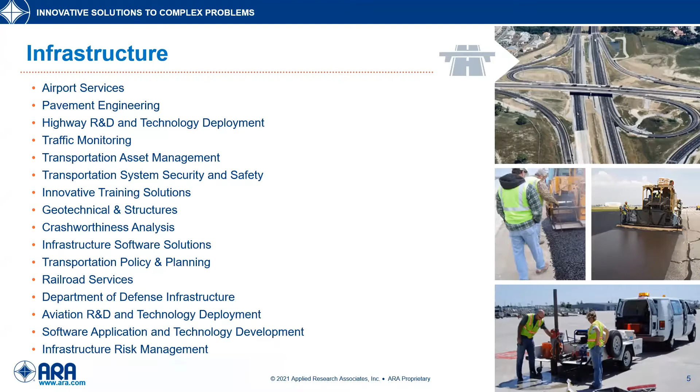So a little bit about the tollway. I'll start with a few basic facts. The tollway is responsible for the construction, operation, regulation, and maintenance of a system of toll highways within northeastern Illinois.

The tollway has 5 roadways that span 294 centerline miles across 12 counties in northern Illinois. We have the Tri-State Tollway, which is I-80, 294, 94, basically connects Indiana, Illinois, Wisconsin, which is why they call it the Tri-State.

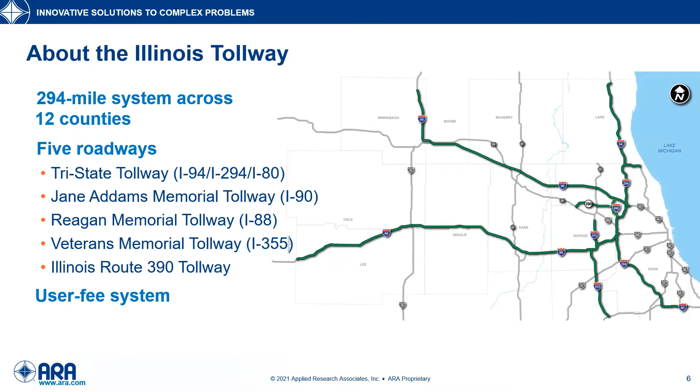So now that we have some background information, let's get into concrete at the tollway. As we go through this section, I'd like to make everyone aware that the research and innovative ideas I'm going to present are not necessarily my original ideas. There have been countless engineers and researchers, some in the room today, like Sachin, that have come up with these ideas and contributed to their success.

A couple people I'd like to mention are Steve Gillen, who was the materials manager at the Tollway until his retirement in 2017, and Cindy Williams, who now leads the materials and pavements group at the Tollway.

Here's a list of the concrete projects I'll be covering today: 2-lift composite pavement, performance specs, HPC, RCC, CRCP, some precast panels and approach slabs, as well as ultra high performance concrete.

The first two are closely tied to the I-90 reconstruction, which happened between 2013 and 2016. This is at the Jane Addams Memorial Tollway I was talking about, I-90. This was a reconstruction and widening project between 2013 and 16.

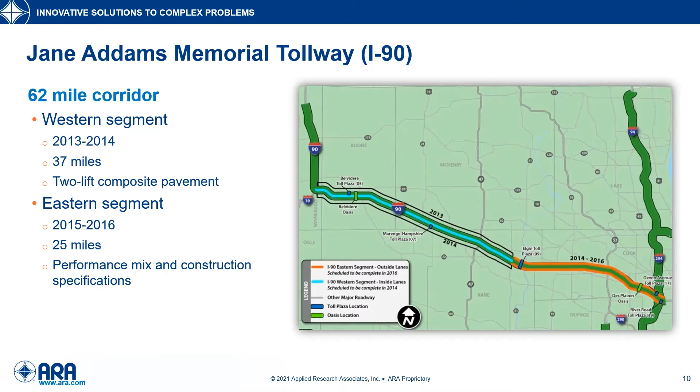Some of the unique aspects of the western segment was the 2-lift composite pavement that was researched at the U of I, led by Professor Roesler and Dr. Alex Brand. The aspects of the eastern segment that I'm going to highlight today are the performance specification for the jointed pavement construction and the performance mix specifications. These mix specifications became more commonplace around this time at the Tollway.

2-lift pavements, specifically 2-lift jointed plain composite concrete pavement with asphalt shoulders, was used for most of the I-90 western segment. Two different concrete mixes were used during construction. The lower lift mix being placed by this machine includes coarse reclaimed asphalt pavement, and this concrete truck is placing a different mix that uses virgin coarse aggregate as the top lift. Then we have the paver in the background that is consolidating and finishing both lifts into the finished pavement, followed up by the standard tine and cure machine.

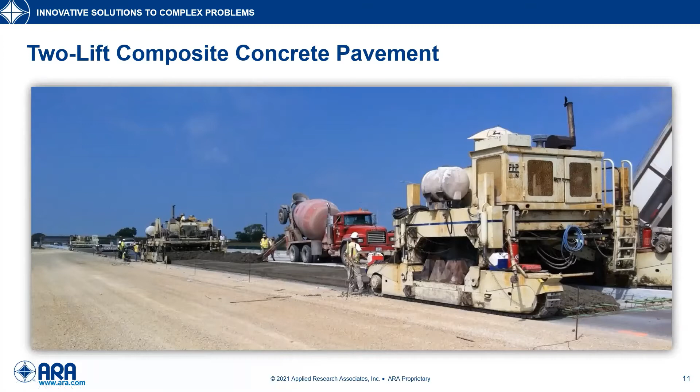Here is a core from that pavement. The concrete mix for the top lift required virgin coarse aggregate, while the concrete mix for the bottom lift required 15 to 50% replacement of the coarse aggregate with coarse reclaimed asphalt pavement. Those are the black aggregates here, you can see in the core. So the bottom lift concrete was commonly referred to as black rock concrete because of that coarse RAP.

The bottom lift also required Portland cement concrete replacement with SCMs, fly ash and slag. Total replacement percentage was between 35 and 50%. The other thing this core shows is a well-consolidated top and bottom lift as it went through that paver.

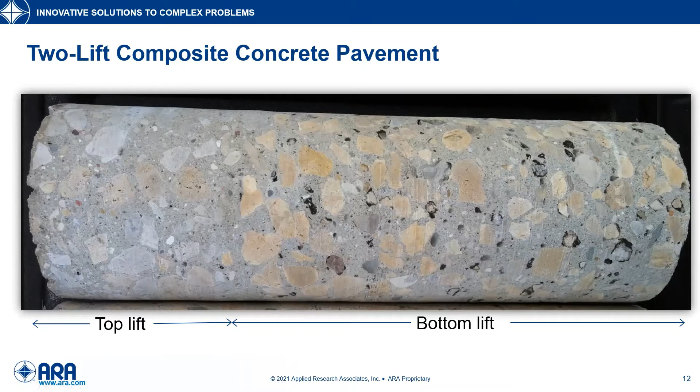These mixes are placed wet on wet, right after each other. So we're looking for full bond between the two lifts, and you can't really even see a bond. It's a full bond on this core. The other thing we're looking for is minimal intermixing between the two lifts. This core is a good example of two distinct mixes that are more or less monolithic. So that was the western segment of I-90.

Now in the eastern segment, the focus was on performance-related specifications. The jointed pavement we built in 2015 and 16 was built with a performance-related construction specification. The idea was to compare the as-constructed pavement to the design and incentivize the contractor if they built it better than design, or disincentivize if the quality was lower than designed. So for that pavement, we had five acceptance quality characteristics in the tollway specification.

This included compressive strength, air content, concrete thickness, surface smoothness, and dowel bar alignment, and each of these acceptance quality characteristics had three levels: a target level, a rejectable level, and a maximum quality level.

The target quality represents the as-designed pavement quality, and it's the level where the contractor would receive 100% pay. The rejectable level represents the minimum quality that can be accepted before corrective action or retesting, reduced payments, or removal would apply. And the maximum quality level represents the level where no further incentive is achievable. Any pavement above the maximum quality level was paid at the maximum incentive.

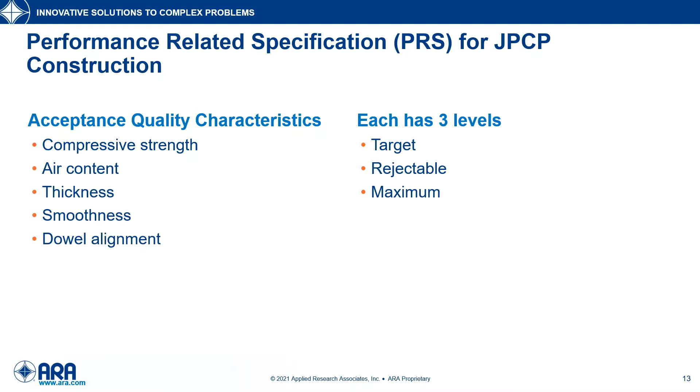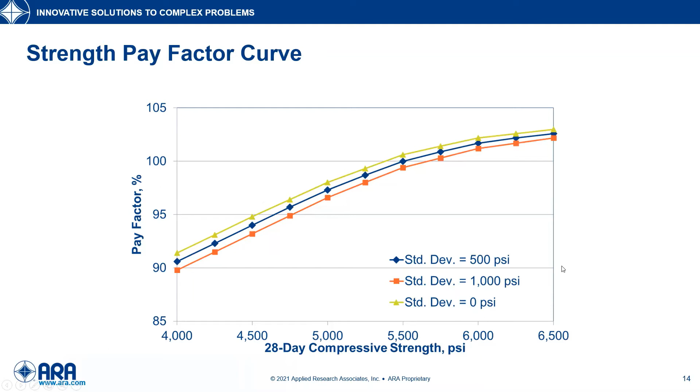If they increased the strength, that was an incentive. Decreasing was seen as a disincentive. And as you reduce your standard deviation, that's also seen as beneficial. So on all these factors, we had curves with the pay factor on the y-axis and on the x-axis, the characteristic we were looking at.

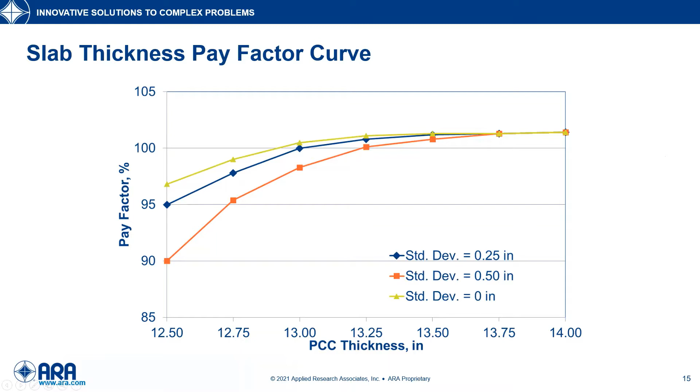But conversely, that same increase does not result in the same increase in service life. This ultimately has to do with the pavement design for that section and the various factors that go into that pavement design.

To wrap up on this performance construction spec, a composite pay factor for the lot was calculated, using each of these individual pay factors, and they all had equal weight. The Tollway selected a maximum incentive of 105% and a maximum disincentive, or minimum, of 85%.

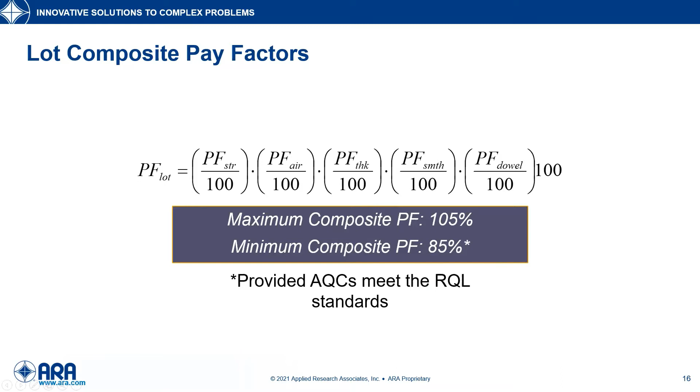So just talked about the performance-related specifications for jointed construction on I-90. This takes us more to focus on concrete mixture specifications and the performance-related specifications for those.

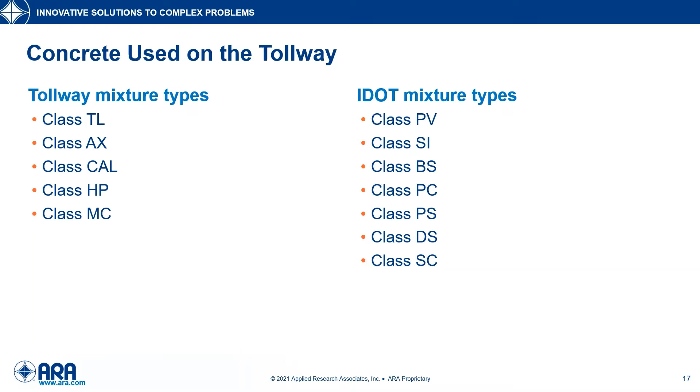The Tollway has five mixture types, and they are designed for specific applications. Both Tollway and IDOT mixture designs can be specified on Tollway construction projects. This is just a list of all the mix types that can be used. I'm not going to go into the IDOT ones in detail today, but these are the Tollway mixture types.

Class TL is the mixture used for pavements. Class AX is a Portland cement-based high-early strength patching mix that can be used in both pavements and structures. 2,500 PSI is our opening strength for pavement patching, and the AX mixtures can usually achieve that in about 16 hours.

Class CAL is a relatively new mixture type. It's used for very high early strength patching and uses calcium aluminate cements along with a latex admixture. The Class CAL mixture can easily achieve the 2,500 PSI opening strength in about 4 hours.

Class HP is our high performance concrete. It's designed to resist chloride penetration while mitigating shrinkage that can cause cracking. The Class HP mixture is currently used for bridge decks, approach slabs, transition approach slabs, and moment slabs.

And finally, we have Class MC, our mass concrete mixture. This is used for structural elements that have a minimum dimension that exceeds 5 feet. So there's limits on the temperature differential as well as the maximum temperature.

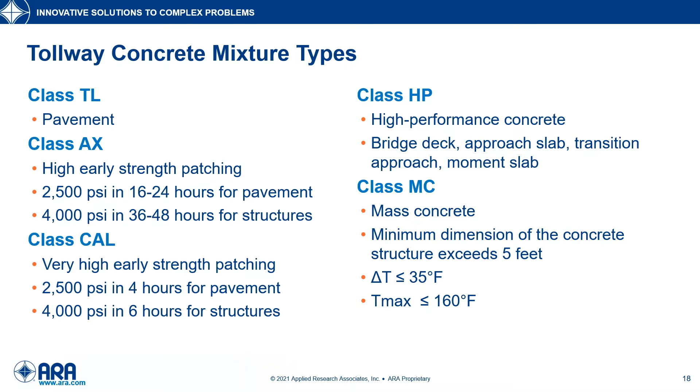So for these Tollway mixture designs, we have 5 primary goals, and these are in no particular order. Strength, we need to have adequate strength for the application, but we don't want mixes that are excessively over-designed.

Durability, the climate in Illinois presents challenges in achieving long-lasting concrete, but it definitely can be done. So, we focus on freeze-thaw resistance, mitigating shrinkage that could lead to cracking, improving chloride penetration resistance to delay corrosion, and then also proportioning mixtures to prevent ASR.

We also focus on constructability, because a mixture that performs well in the lab won't necessarily be able to be consistently batched, placed, consolidated, finished, and cured in the field.

We also have a focus on performance, and the concrete producers, material suppliers, contractors that serve the Tollway, they themselves have a wealth of concrete knowledge and expertise. So having a performance focus allows the Tollway to reduce prescriptive requirements, encourage innovation, lower costs, and increase durability of concrete structures and pavements.

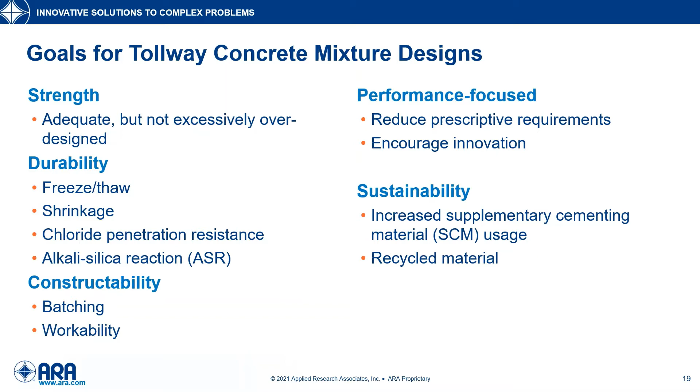And then finally, sustainability. We try to include recycled and byproduct materials in Tollway concrete to improve, or at least maintain, our current level of quality.

So as I mentioned, we try to focus on performance with our Tollway mixtures. This is a list of test methods that are required. Our higher end Portland cement mixtures like AX, HP, and mass concrete require the most testing. The test limits for each of these mix types can be different depending on how the mix will be used.

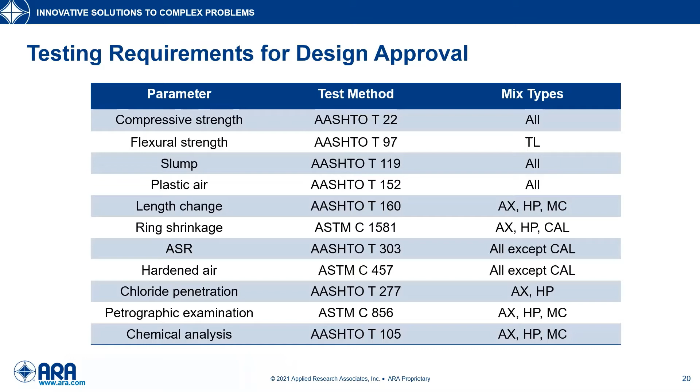So now that we've talked about concrete mixtures as a whole, let's dig into a little more of the details of HPC. So here's an example of the testing requirements for a Class HP mix.

We use the Class HP high performance concrete mixture for bridge decks. It's designed for 4,000 PSI at 14 days. It requires freeze-thaw or hardened air, a slump loss test, linear shrinkage, ring shrinkage, chloride penetrability, and then has some water-cementitious ratio tolerances during production.

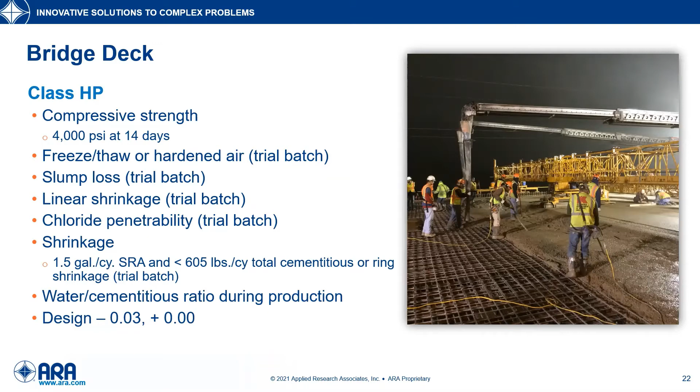And so the bridge deck mix and the Class HP, we're really focused on mitigating shrinkage cracking because it's used for bridge decks. And that's usually achieved through either optimized proportioning and shrinkage reducing admixtures, or lightweight fine aggregate for internal curing.

But here's another option we're exploring. The Tollway has an active research project on super absorbent polymers in concrete to improve durability. This project was started in 2019 and will wrap up at the end of September.

This research includes testing on the SAP material itself, and then evaluating its effect on HPC when used as an internal curing agent. There have been some interesting findings in the lab work, and the research team led by Professor Lange is planning a field test section for the end of April.

Actually, ACI Illinois will be having a virtual chapter meeting on April 22nd, and we'll be welcoming Professor Lange to present the latest findings of this research.

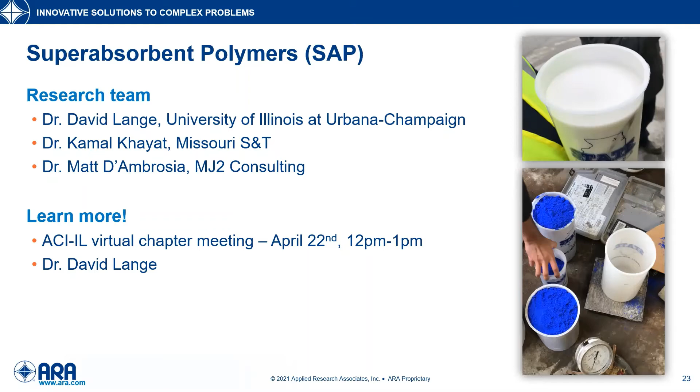Moving right along, the Tollway did use RCC in 2014. Very familiar with these projects. It was used for truck parking lots at 4 Tollway Oases.

And this one, basically 3 out of the 4 projects had an asphalt overlay on the RCC, just to have kind of a better finished surface.

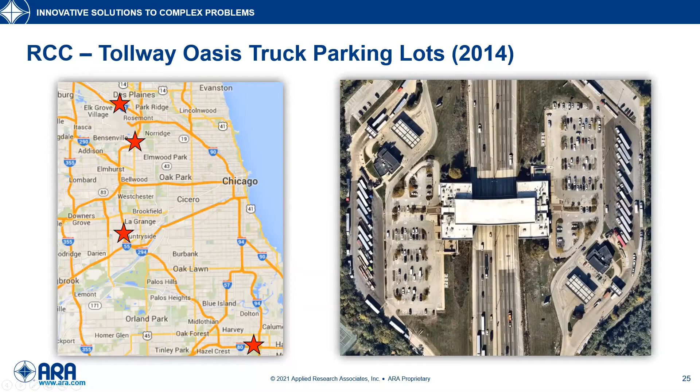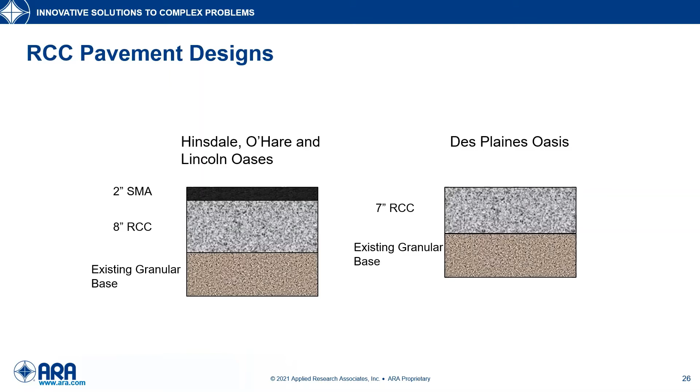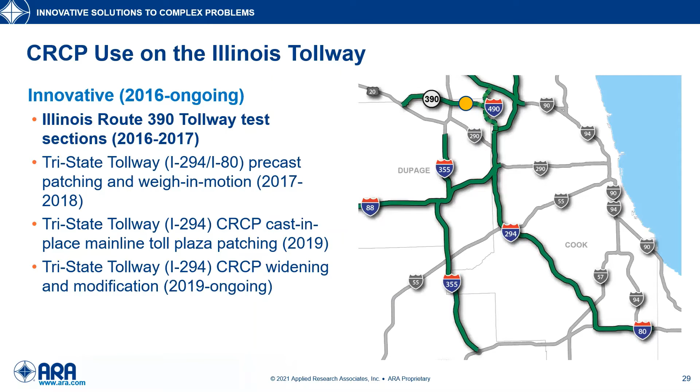So I will first talk about the Illinois Route 390 test sections. The Tollway funded a research project to investigate innovative structural and materials design for CRCP. The project looked at methods to build a more cost-effective CRCP by considering how an internally cured pavement mix would impact crack spacing and width, also pavement thickness and percentage of steel. This work was conducted by Professors Roesler, Weiss, and Zollinger. As part of this research project, the Tollway built 9 3-lane test sections on the greenfield construction section of the Illinois 390 corridor in 2016 and 17 to test out these new ideas.

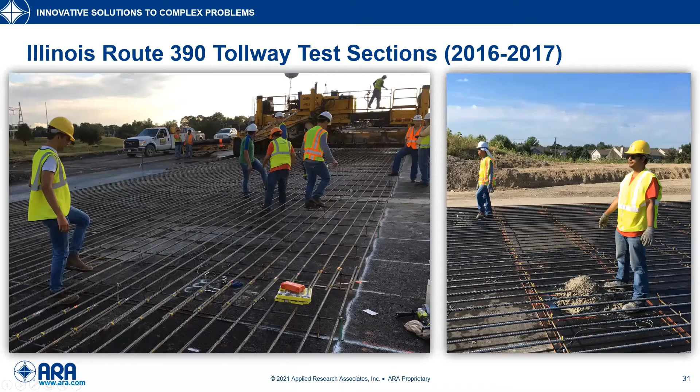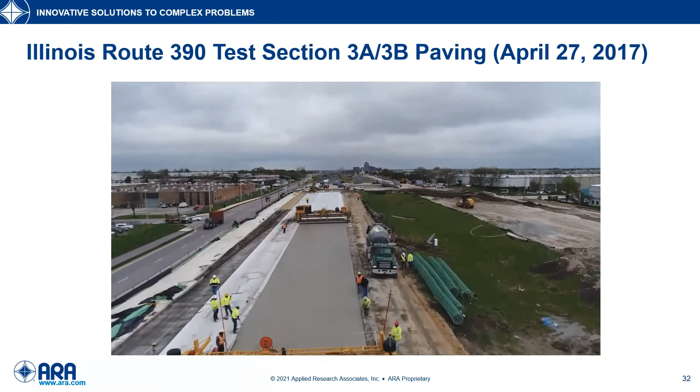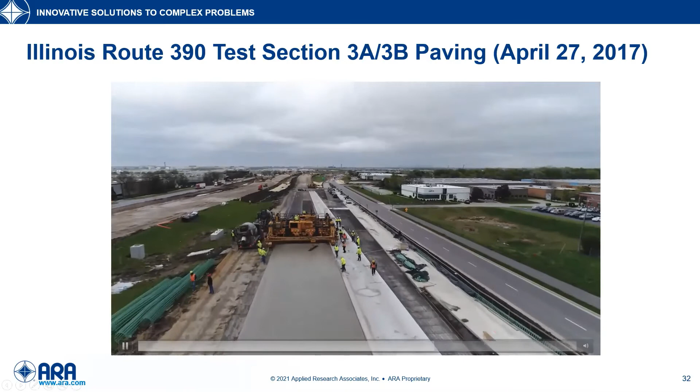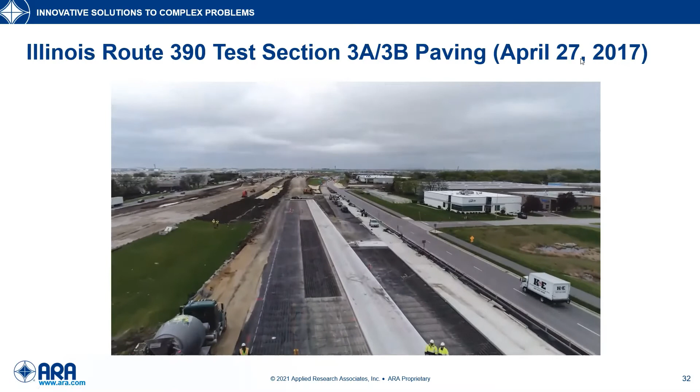Section being tined here had macro fibers. Some of the other unique features - there's an end treatment here, which is a different design from the typical lug system or wide flange beam. And finally, as we get to the end here, you can see these cones, and those are the locations of the various sensors that were embedded in the pavement.

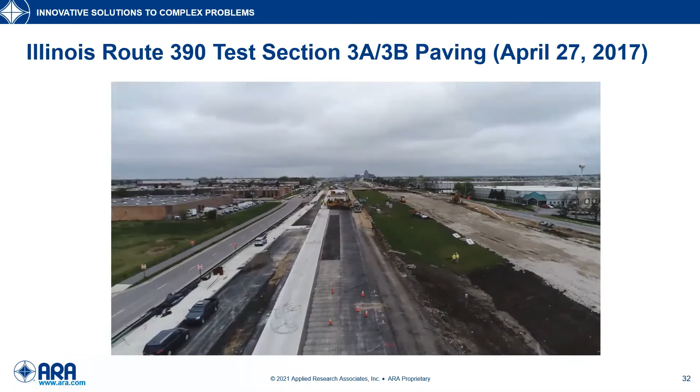All right, so the next project is also CRCP, but mainly focuses on precast patching and weigh-in-motion on the tri-state tollway. The precast CRCP, this was a joint effort by Steve, Shiraz Tayabji, and myself.

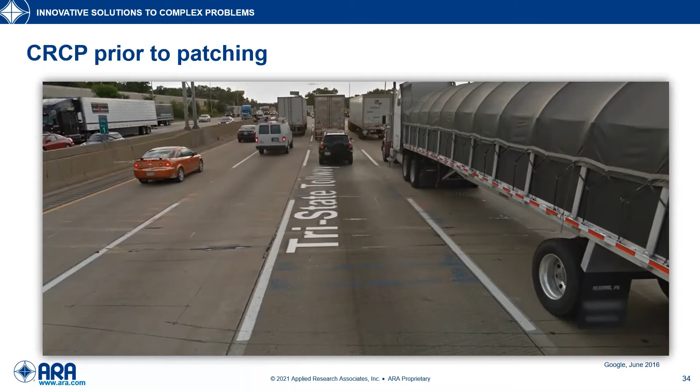So here's a Google Street View of the project site before the patching. There was a weigh-in-motion system in CRCP that was no longer operational and caused distress in all lanes. High traffic volume in this area required an overnight solution to maintain the same number of lanes during the day.

So the patching was performed in October 2017, utilizing precast panels for CRCP repair. The multi-lane night operation was like the conventional jointed precast panels, but it was complicated by the desire to maintain longitudinal reinforcement continuity. So the first night involved marking patch limits and saw cutting.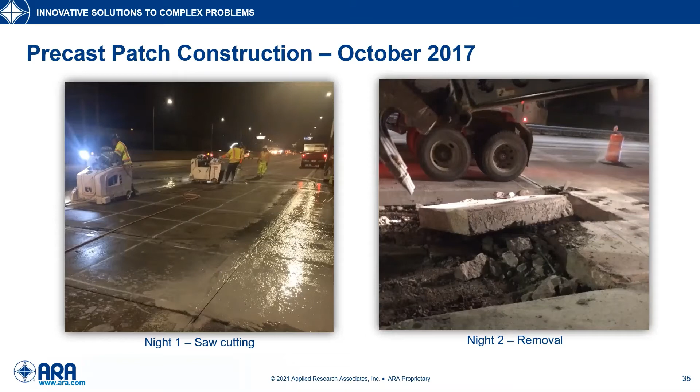The second night, pavement removal began once we had the lane closure set. After the existing pavement was removed, the base was recompacted. We added aggregate if necessary, so that the gap underneath the panel wouldn't exceed an inch. The contractor then drilled and epoxied number 10 rebar into the existing pavement, and this was done to maintain the continuity of the longitudinal reinforcement once the repair was completed.

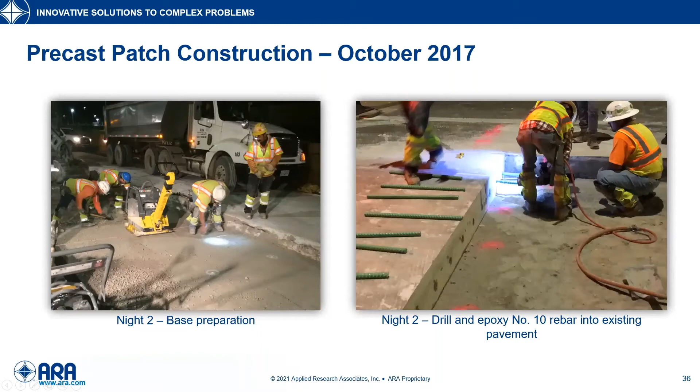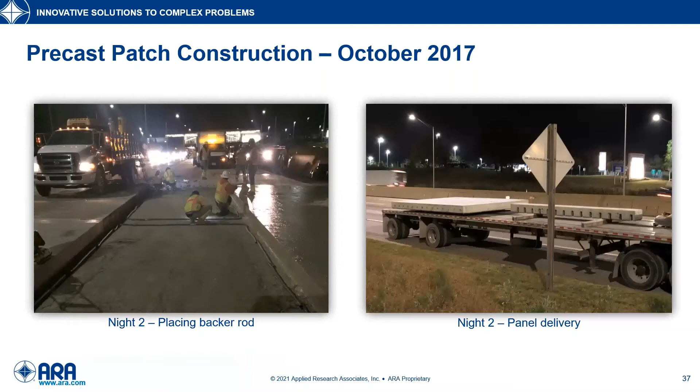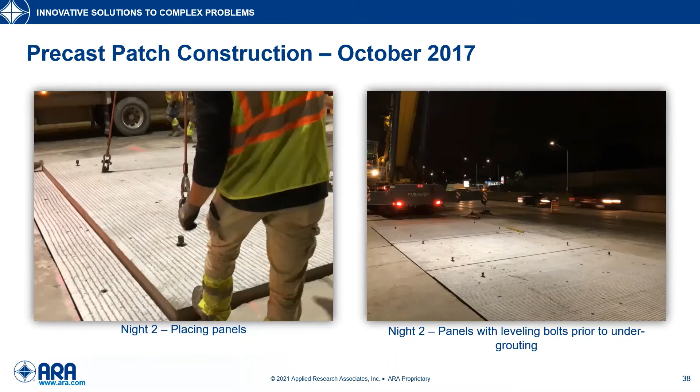Also night 2, backer rod was attached. This is used to contain the undergrout under the panels. And then the panels were delivered the night they were set. Also wrapping up that same night, panels were set continuously. The panel at the left there is a temporary dummy panel that was needed to open the roadway to traffic, since we couldn't get everything done in the second night that we needed to. The permanent panels were set on leveling bolts and undergrouted, and after the grout achieved strength, the leveling bolts were removed and panels were opened to traffic.

So on the third night, the temporary panel was removed. That splice zone was backfilled with a rapid set cast-in-place material. For this project, we tried a high early strength UHPC mix and also a steel fiber reinforced CTS rapid set DOT concrete mix design.

So briefly touched on that, Precast CRCP. If you'd like further details on this project, there's an FHWA tech brief, and there's also an article published in Concrete International in October 2018. Check those out.

Just downstream of the Precast CRCP, another innovation involved adding weigh-in-motion equipment to the precast panels. These panels were installed across all 5 lanes in February 2018. Each precast panel was 14 feet long and had that similar 18-inch cast in place splice zone on each end.

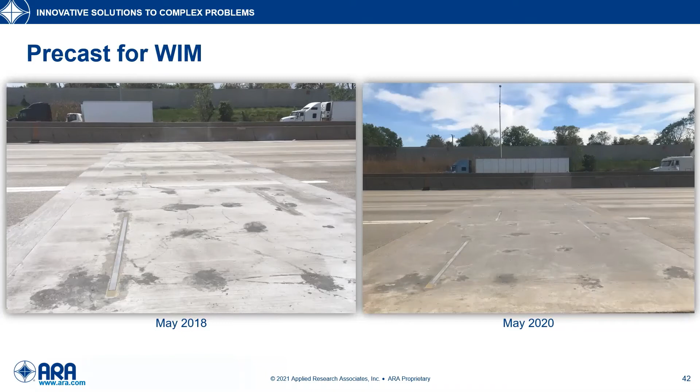Here's just a recent Nearmap aerial of both precast sites. So the CRCP patches, the precast, replaced the distressed WIM and pavement there.

The new WIM was installed in precast panels, a couple hundred feet downstream, to mainly give this new pavement the best shot for long-term performance. We diamond ground the entire area for smoothness. Both of these repairs are performing well.

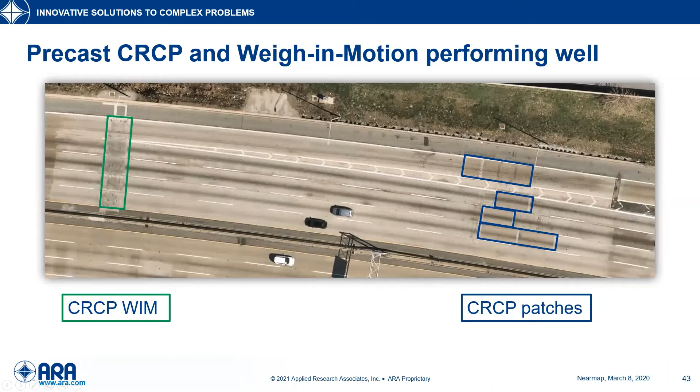So we used UHPC for those precast CRCP systems, but there have been a couple more recent uses. Ultra high performance concrete, UHPC, isn't necessarily a new technology. It's commonly associated with accelerated bridge construction, but recently it has been gaining interest in Illinois and elsewhere for rehabilitation use, such as UHPC bridge deck overlays, and UHPC for bridge preservation and repair is currently an innovation in round 6 of the Federal Highway Administration's Every Day Counts program.

So this year, the tollway is using UHPC to fix bridge joint headers on 355, and that's this picture here. You can see there's a temporary asphalt patch in here, and this is the joint between the bridge and the adjacent pavement.

This is highly prone to distress, so we think UHPC would be a good option to patch the concrete in this case. The project's specific special provision requires compressive strengths of 12,000 PSI at 12 hours and 22,000 at 28 days, which is pretty typical of UHPC. Among other mixture requirements, this is just highlighting the strength requirements.

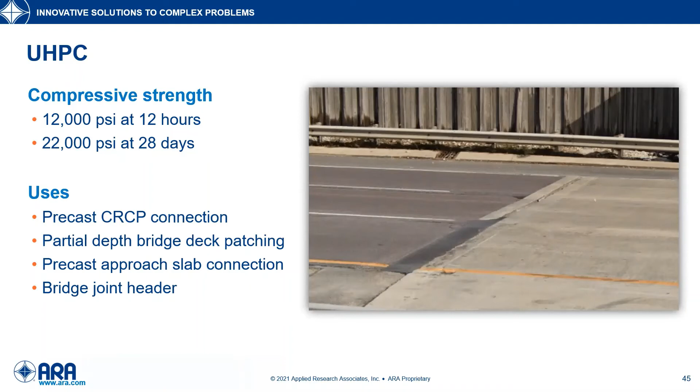Like I said, we've used UHPC for the precast CRCP connections. We've also experimented with it for partial depth bridge deck patching, and we currently specify it for our precast approach slab connections.

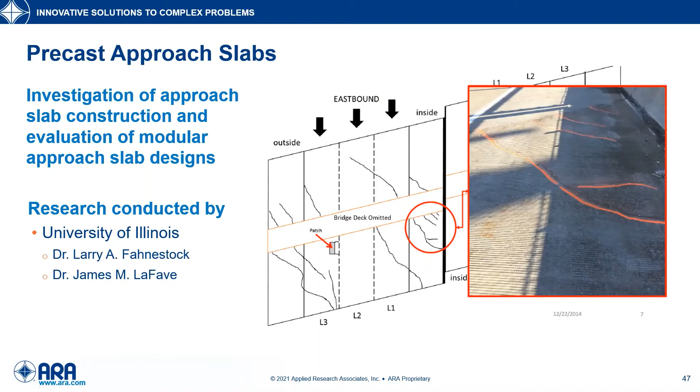The tollway's approach slabs are 30 feet long by a lane width, and they're on both sides of the bridge deck. In this illustration here, the bridge deck's omitted, but you'll have a set of approach slabs on both sides. This research was conducted by the University of Illinois by Professors Fahnestock and LaFave.

So, precast approach slab fabrication. These precast approach slabs were one of the more interesting parts of the project. Here's one of the shoulder slabs being cast at the precast facility.

This also is one of the slabs that the research team instrumented. All this red wiring is going into the slab for their embedded gauges. The precaster also used self-consolidating concrete for these slabs.

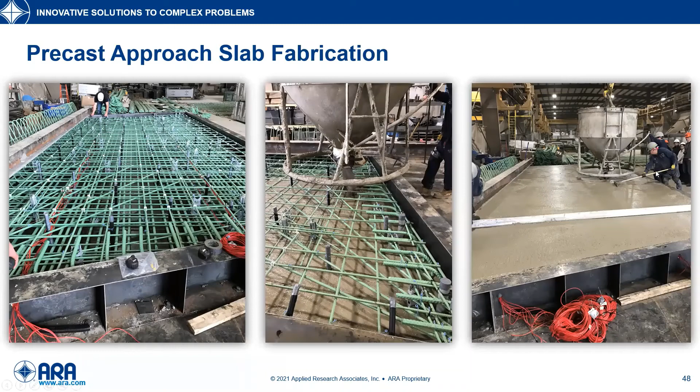So the slab installation was also exciting to see since these slabs are quite large and we needed a large crane. And here's kind of the finished product. These were the slabs that were instrumented, so all the wiring was coming out of this joint here, which is an expansion joint, and then the grad students got everything hooked up after the fact.

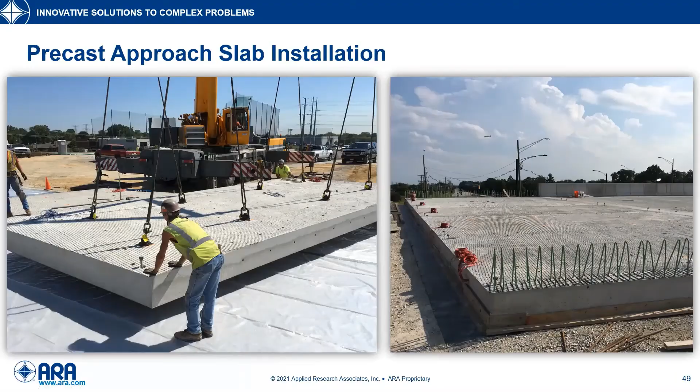So I've just touched on most of the concrete projects I've been involved with over the past 8 years at the Tollway. I've also highlighted some of the Tollway research projects led by U of I, and I think this shows the importance of research, new ideas, and innovation. In my experience, I see applied transportation research tied to project design, construction, and ultimately maintenance, following a cycle like this.

In the case of the precast approach slab project, there were maintenance concerns with early age cracking. So the research looked at factors we can change in the design as well as the construction phases to ultimately reduce and eliminate the cracking.

Sometimes the design phase generates the research, like in the case of the U of I CRCP research project. There was an interest in designing a CRC pavement that was more competitive on an initial cost basis, so it was really looking at the design aspects.

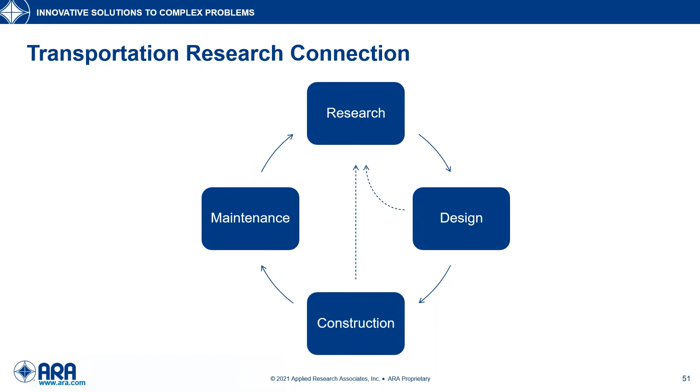Also, construction experience can generate research, like in the case of the super absorbent polymers. We're looking for more options in construction to meet those performance specifications.

In my experience with the Tollway, there's a strong interest when identifying research needs that they be applied research that can be implemented. In my role with the Tollway, I help with research project management, including things like constructing test sections, and then at the end of research projects, helping to implement the research findings.

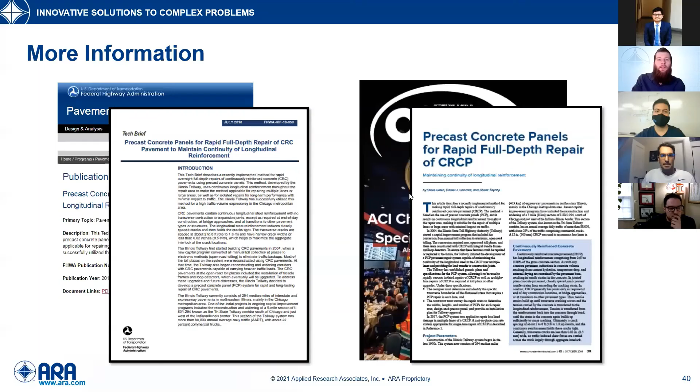Sure, let me share my screen again. And it's kind of funny, because yeah, there are definitely challenges with precast pavements.

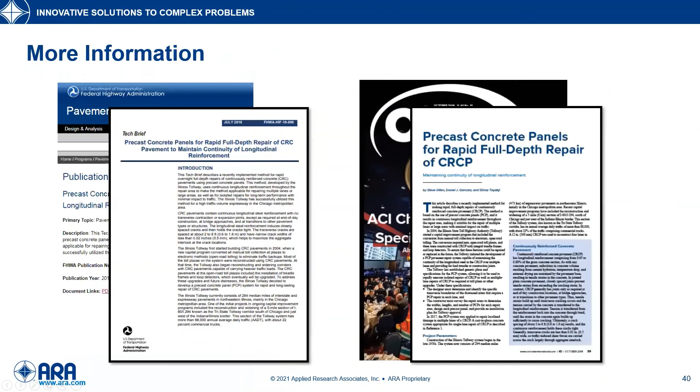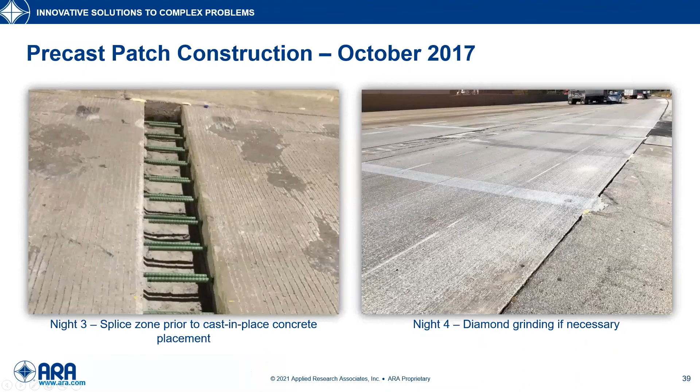With the weigh-in-motion, this one, the CRC precast, was actually almost easier for the tolerances. I say that because these precast panels are usually the full lane width, and in this case with CRC, we have these closure pours, so if they're not exact, you can make it up in the closure pour. With the jointed system we're designing right now for next year, you basically cut the hole to fit the panel, so that's definitely a tight tolerance.

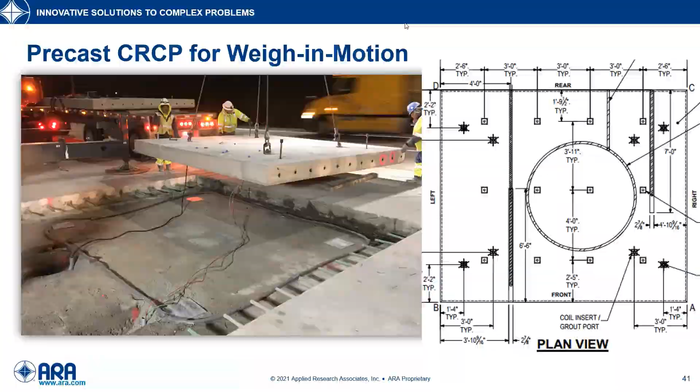While doing that, it definitely adds a level of complexity. But ultimately I think we were able to achieve it on this project, and it can be achieved as long as all stakeholders are communicating ahead of time and planning things out. It can be done, but as far as concrete patching goes, this is definitely at the complicated end of things.